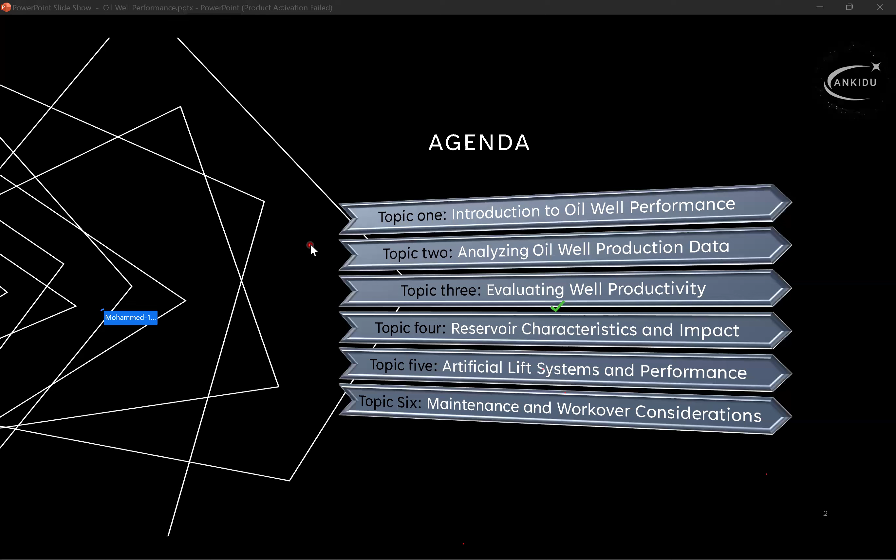So, introduction to the oil well performance. Building our discussion, we will cover the pre-drilling preparations, well planning, and drilling process. We know it's crucial for successful outcomes. Each stage, from completion to ongoing operations, affects not just the immediate yield, but also long-term productivity.

So the well basics include and it's essential to comprehend the fundamental components that ensure effective extraction. Understanding the oil well structure starts with key parts such as the wellhead, where all the surface equipment is mounted, enabling control over the flow of oil and gas. Casing plays a crucial role in providing integrity for the structure of the well, while analyzing well performance.

Various factors such as geological conditions, equipment quality, and operation efficiency must be considered, all of which I will dive deeper into on the next slide about well performance.

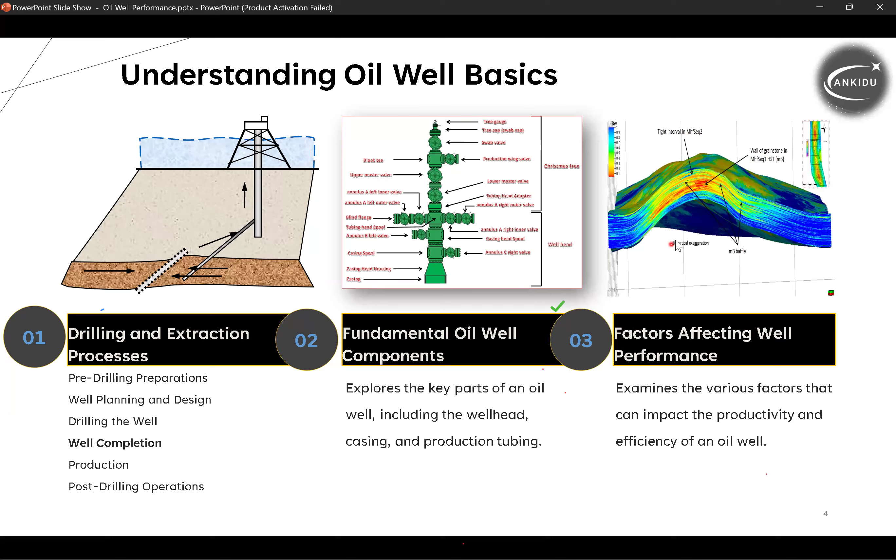So let's continue with drilling. We have to understand the complex machinery involved, from the rigs to the experienced people, how they were trained working in this environment, starting from the pressure gauges and valves, etc. The pre-training given to them is critical for effective drilling and extraction.

So drilling involves many risks, starting from the first day to the delivery of the well. So pre-drilling preparations are essential for successful drilling operations. Gathering geological data through surveys and sample collections can identify optimal drilling locations.

So for pre-drilling preparation, let's take an example. Conducting geological surveys is very crucial for selecting the well location. This groundwork aids in assessing rock and soil characteristics, ultimately influencing site selection.

Let's go further into well planning and design. It's the most important factor, not just the technical specification, but also safety and environmental impacts based on gathered data. Creating a detailed well plan is vital for minimizing risk during drilling.

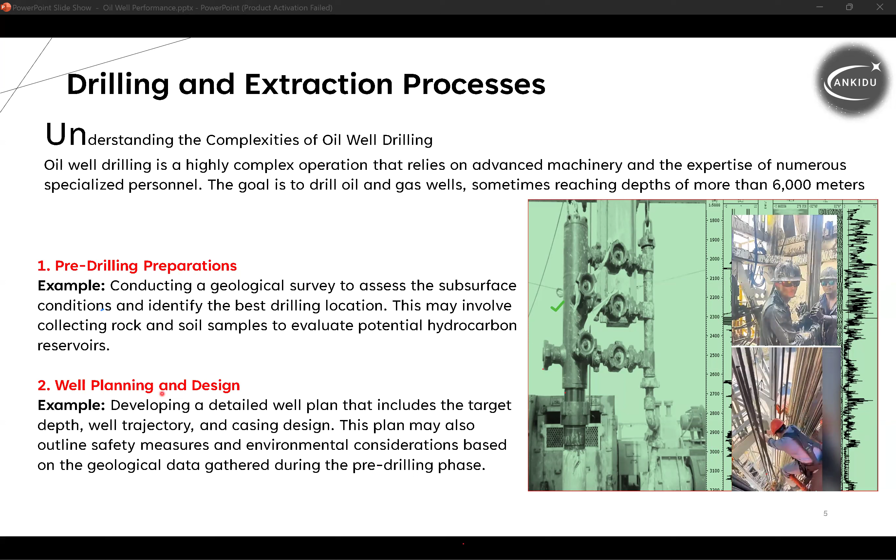Drilling the well starts from putting the rig on site and from the first day of drilling, penetrating the surface, going to the target formation, circulating the muds, and everything else. It's a very complicated procedure, and it is time and cost intensive throughout this phase.

Well completion involves installing casing and cementing the sand face between the casing and the formation, which is very crucial, along with perforating the well - where to perforate and what type of casing to use. All calculations must be provided to complete the well perfectly, otherwise we may have a collapse problem if the casing material isn't selected to match the exact formation.

After finishing the drilling, we have to consider production. So what should be installed in terms of the Christmas tree, the flow lines, and what pumps are needed for production, whether oil producer, and how to optimize the production afterward and optimize recovery from the reservoir for that specific well.

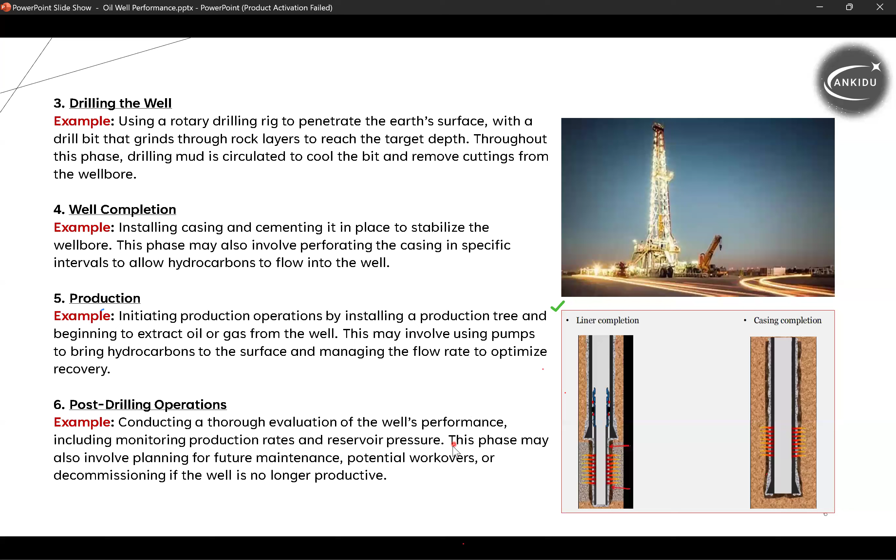Post-drilling operations are very important because we need to know if the well performs as expected, from the first day of planning the site through drilling, finishing the drilling, and delivering that well connected to production. Monitoring production rates and reservoir pressure, etc., is very important to assess what the well is doing.

So these kinds of procedures and processes have to be followed to ensure the well performance is as expected. Let's go to one of the fundamentals about oil well components.

We know for sure there must be a Christmas tree and wellhead installed, and these parts are connected together to seal - there should be no space. What parts should be installed and why, how many valves should be installed, what type of well, what is the operating pressure - all these equipment should be installed perfectly, and it's very crucial.

Understanding oil well basics leads us to the fundamental components essential for well operation: the tubing head, spool, etc. The tubing adapter serves as a crucial interface between the wellhead and the production equipment, while the casing head housing supports the weight of the casing and seals the annulus. The casing spool is vital for properly sealing the casing and providing connection for other equipment, facilitating pressure management.

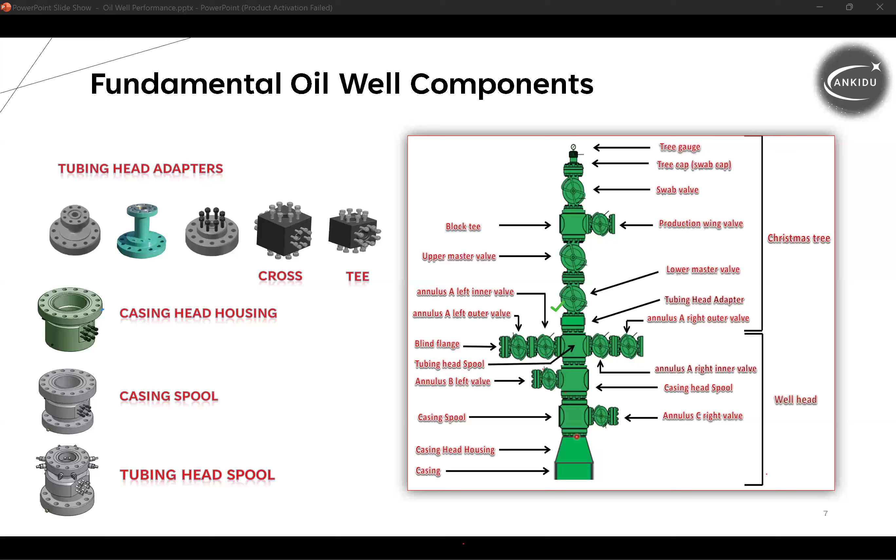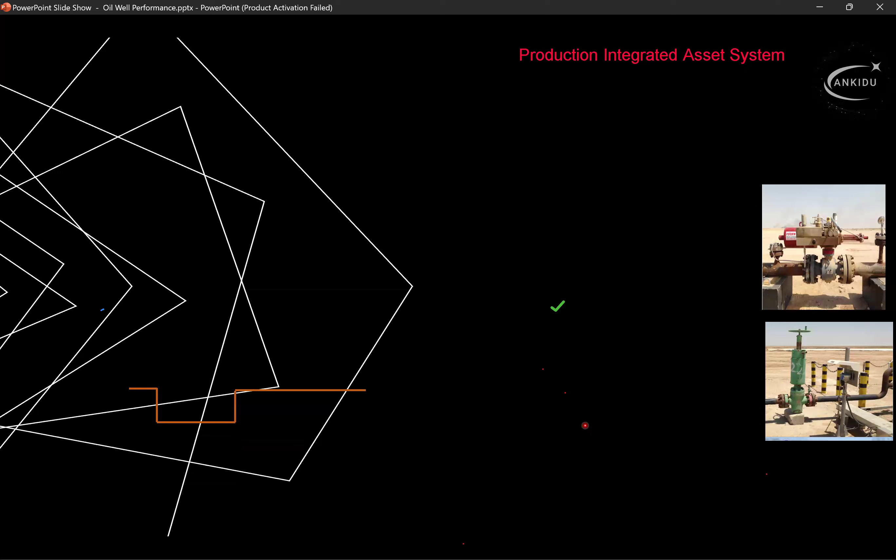Let's look at this production integrated asset system, starting from the well and ending with the degassing station. What we have to consider, and what questions should be asked regarding this production system: why we installed this Christmas tree, where we are going to produce from - is it from the annulus or from the tubing?

So why do we have to put this Y piece? What surface equipment will be installed - the choke size, the gate valve, the safety valve? What is the length of the production pipe? What is the diameter of that production pipe? How many valves will be installed along the way to the degassing station?

What are the inclinations? We know some pipes have inclination along the way from the well to the degassing station, and this may affect the flow from the beginning at the well all the way to the end at the degassing station.

So when the flow reaches the degassing station, is it connected to a high pressure header or a low pressure header? Why might we ask these kinds of questions? Sometimes we find it's related to the oil well performance.

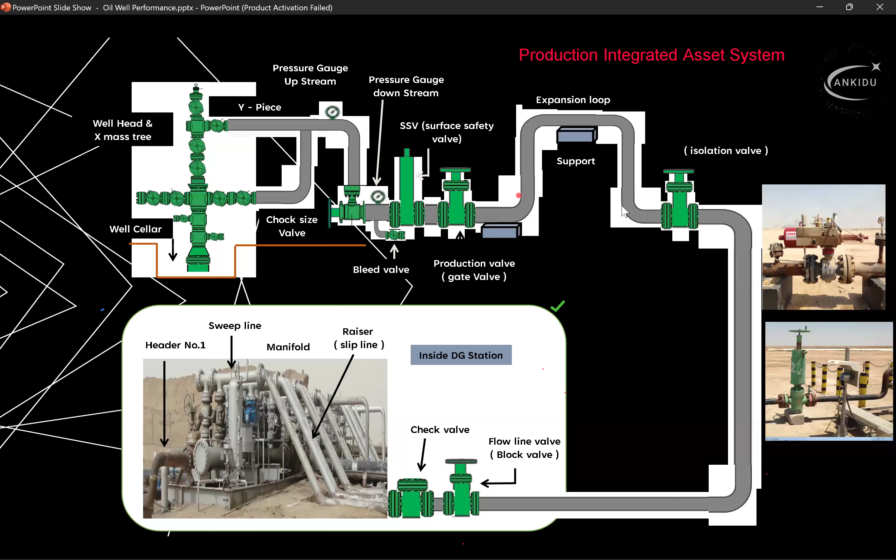So at every point we have to consider the pressure, temperature, etc., and the factors playing around the well performance. So if we start talking about factors affecting oil well performance, let's take this illustration.

Starting from reservoir characteristics, which is porosity for sure, permeability, and fluid properties — what is playing here and affecting the flow from our reservoir through the wellbore.

What is the operational condition? Do we have a pump installed? What is the pump efficiency? What is the depth of the well? We know some wells with higher depth, depending on the perforation and the reservoir, may not easily extract the hydrocarbon because of the depth or high pressure, or maybe some circumstances affecting the fluid column, because we have back pressure from gravity, hold-up factors, flow regimes, etc. All these kinds of consideration regarding operational conditions definitely impact the well performance.

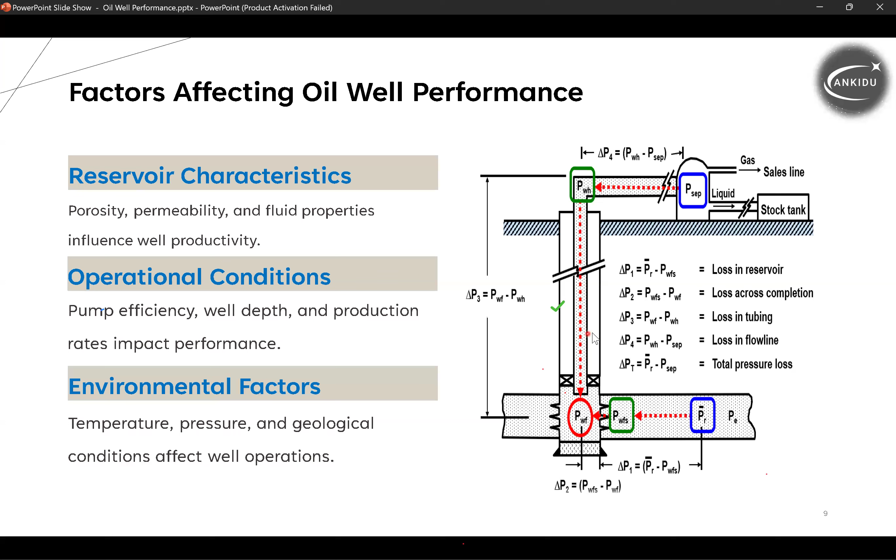So back again to reservoir characteristics, which is fluid properties. We know the fluid properties play a crucial and vital role in the reservoir and in the well performance.

So we have a question here: can the fluid properties change over time? What is the answer? Yeah, it can change. So for instance, taking the viscosity or GOR, water cut — from the first day we can expect these type of values to be constant, and then it could change over time.

So when it changes from what is expected, we have to consider new rules for the well performance, and manage techniques such as water shutoff, EOR, regular monitoring, extra monitoring, and determine if it's possible to keep it as it is, or what is the mitigation regarding these types of information changing through the well performance oil life. So all these kinds of questions have to be raised and studied very well by reservoir engineers regarding well performance, and that's very important.

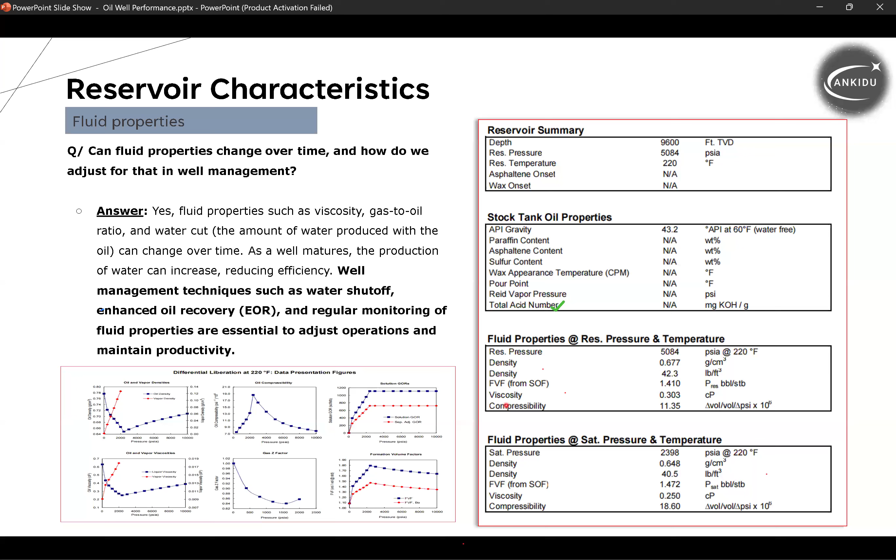Analyzing well production data - we know the production data is very important. It's like the eye of the engineers working in monitoring the well performance.

So what is the collection and compilation of that data? Starting from gathering production data, organizing the data, and validating data quality. These steps are very, very important.

Taking the example of collecting data, it's about what the well is doing in terms of oil or water, or what is the BSW for that well. Then we have to put it in a structured database. It's crucial to establish an effective data collection and compilation process.

First, consistent daily records of oil, gas, water production are essential. This includes gathering all relevant production data to ensure comprehensive insight. Once we gather the necessary data, we must compile it into a centralized database.

The database is very important. We will go through some slides about the data and the visualization of that data, addressing issues like insufficient well tests, incorrect entries, or bad routing information.

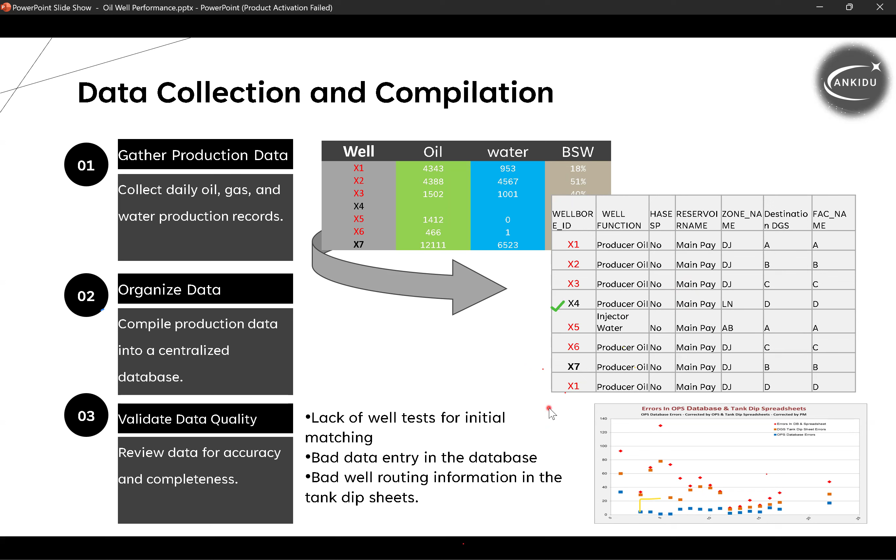The data lays the groundwork for analyzing production trends. We'll look at production trends in a moment. After collecting and validating production data, the next step is conducting a thorough production trend analysis.

What does that mean? This involves examining historical data to uncover fluctuations and patterns that may not be immediately apparent. Sometimes we have to keep an eye on the production data to eliminate uncertainties and discuss why we have these trends and fluctuations and patterns.

Identifying these production patterns is crucial as it aids in recognizing inefficiencies in well operations, such as issues with pumps, or maybe blockages stopping the well from producing as it could be.

So if we consider the plateau rate is 10,000 MBD, why is there decreasing pressure in oil performance, reaching about 1 or less than 1 MBD? What is the mitigation to bring the well back? What is the plan to restore production from the well?

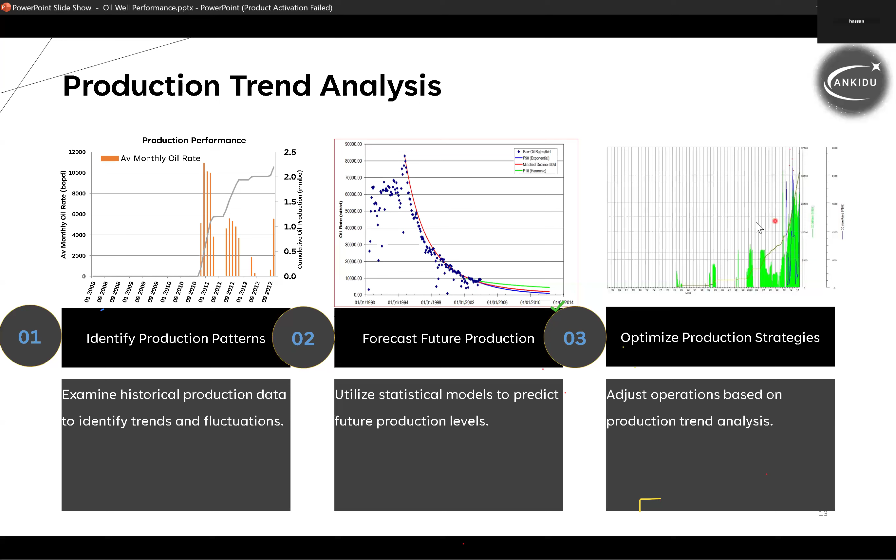Forecasting based on historical trends allows us to adjust operations proactively, optimizing our production strategies moving forward. Optimizing production strategies depends on what we have already collected as data, monitoring well performance, and predicting what should be done through the oil well's life, adjusting operation based on that production trend.

Why do we have these anomalies in production? It's regarding the time frame - is it 1 year, 2 years, and why is it going down? Is there any potential to restore the production? Yes, definitely yes. So how can we assess that production trend?

We go back to the historical data we have, cumulative production, and see what is going on here, what production enhancements should be done. Understanding these trends, operators can identify where to tweak operation parameters.

For instance, if we have ESPs installed, we can manage these ESPs and restore production from those wells, or maybe we need to do some extra work as surveillance, do a workover, or add perforation, etc.

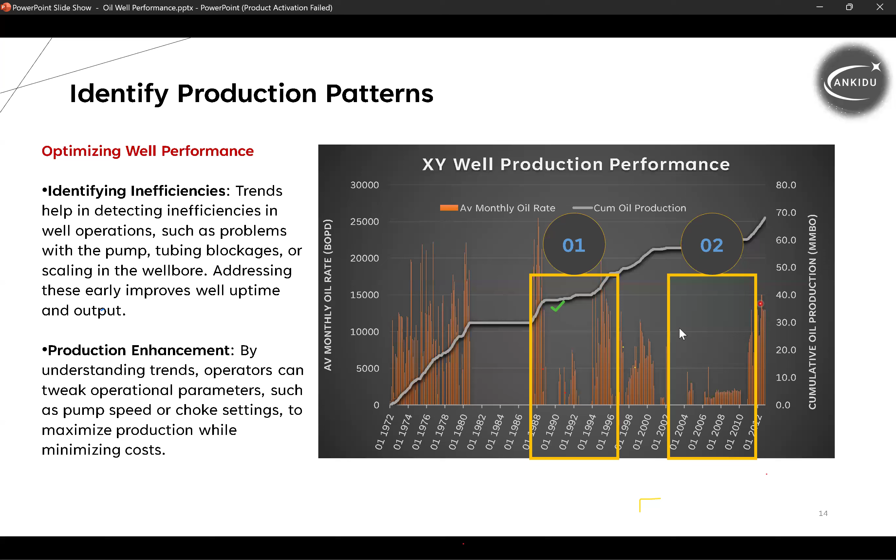So from these trends and nice plots, we can discuss with the production engineer and facilities engineers to see where the problem is and how we can mitigate it and return to normal production. We can see there's a huge difference between what we expected and what we get afterwards. With the help of our calculations we can understand where the problem is and investigate further to check where the underperformance happened and why.

So maybe it's not related to the well itself, maybe it's related to another facility connected to our well. So underperformance may not be related to the well itself.

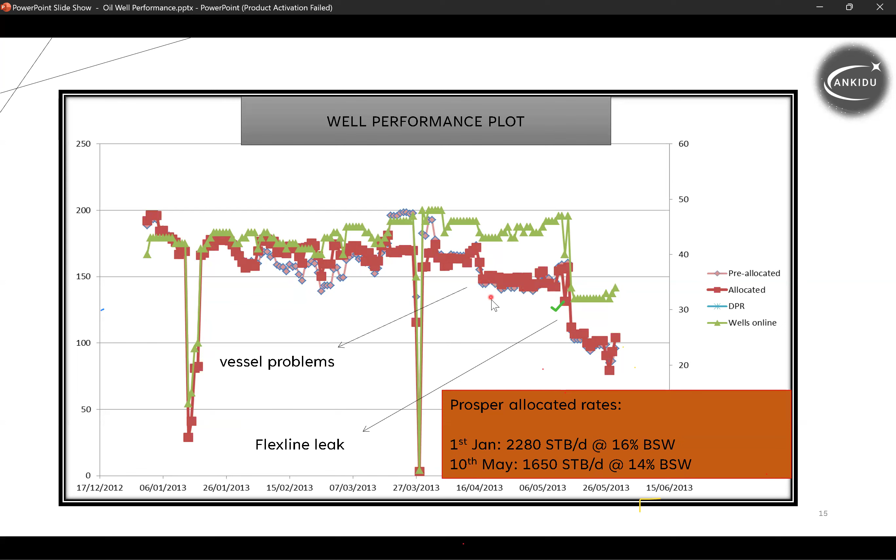So we have to do our prediction to know where we can enhance production, where we can enhance the reservoir pressure. This point is very crucial in terms of forecasting future production. Identifying the bottlenecks in the well's performance, and the predictive analysis, can suggest where we can add more oil or restore production for the rest of the well's life.

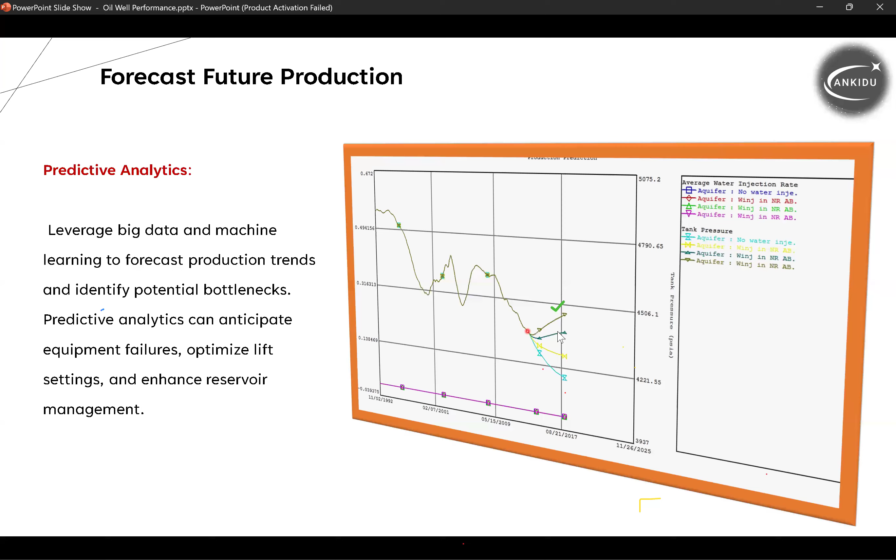Regarding the water cut, we have what the GOR represents here. So all these parameters, after putting them into our software and plotting the IPR VLP, can tell us the optimum flow rate we should expect from our well. This is very important because we need the well flowing for a long time with stable conditions. Fluctuations like these trends and plots are not acceptable, because if we exceed the amount of excessive production, it may affect the well performance, and we could lose the well.

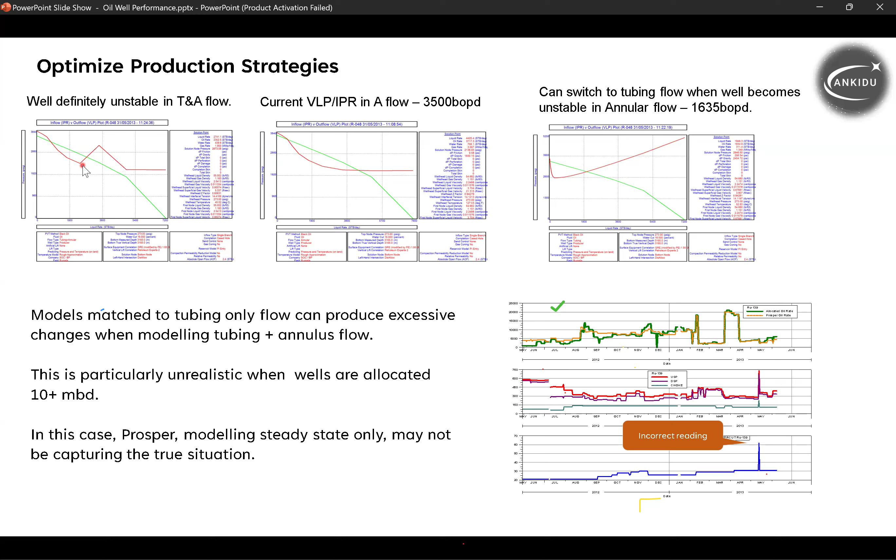So what we have nowadays is new technologies implemented in our fields. Considering the current VLP-IPR in the flow, it's critical to embrace automated monitoring systems for effective production management. These systems enable real-time data, connecting our wells to our software and analytical systems so we can track well reservoir performance, facilitating immediate adjustment.

We've seen many examples for well performance where we conduct fast decision making and implement new strategies to mitigate the risk of losing the well, avoiding reservoir damage such as excessive drawdown leading to issues like coning or sand production. This preventive strategy ensures long-term recovery stability.

So integrating smart well technology with real-time monitoring capabilities elevates our operational efficiency. It's very important, very crucial, and very handy nowadays. As an end user, you have all the data instantly presented on your screen, so you can decide where the problem is and how to mitigate it.

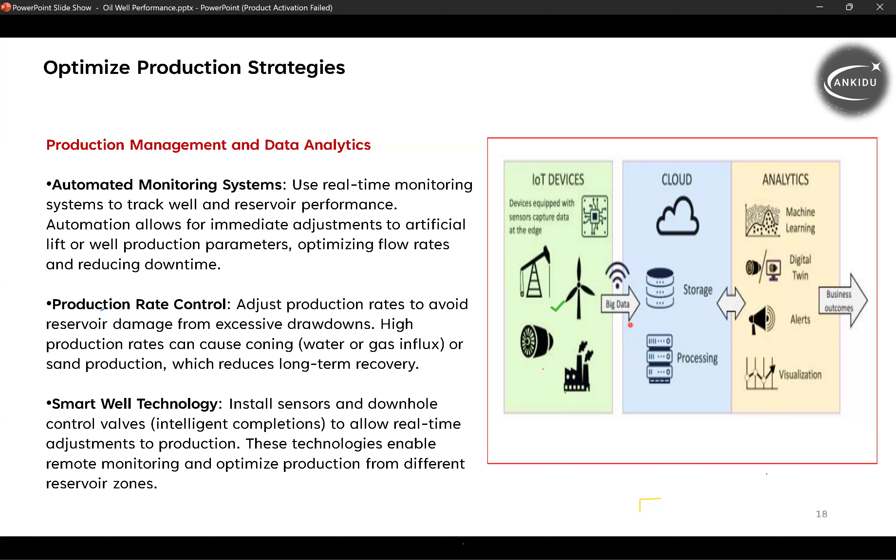So allowing for adjustments across varying reservoir zones, moving forward for a nice performance of our well. This eventually ends with evaluating well productivity in a good manner. So evaluating well productivity index calculation.

We know it's very important to know the well productivity index. How the well is producing is crucial to understanding how to optimize extraction methods. So the productivity index calculation measures the relationship between production rates and pressure drawdown in the reservoir. This helps quantify well efficiency by assessing how effectively the well converts reservoir energy into fluid production.

So moving from unstable flow to stable flow, where's the maximum point we can reach? Taking this plot between Q and pressure, we can build a good relationship between the pressure and production, and understand what is going on inside the well and reservoir.

Having said that, the well converts reservoir energy into fluid production. Key factors that impact well productivity include permeability and skin effect, which can alter flow characteristics. By assessing reservoir condition, we can identify opportunities to enhance performance of our well and maximize output, as we have to remove this skin and eliminate these factors.

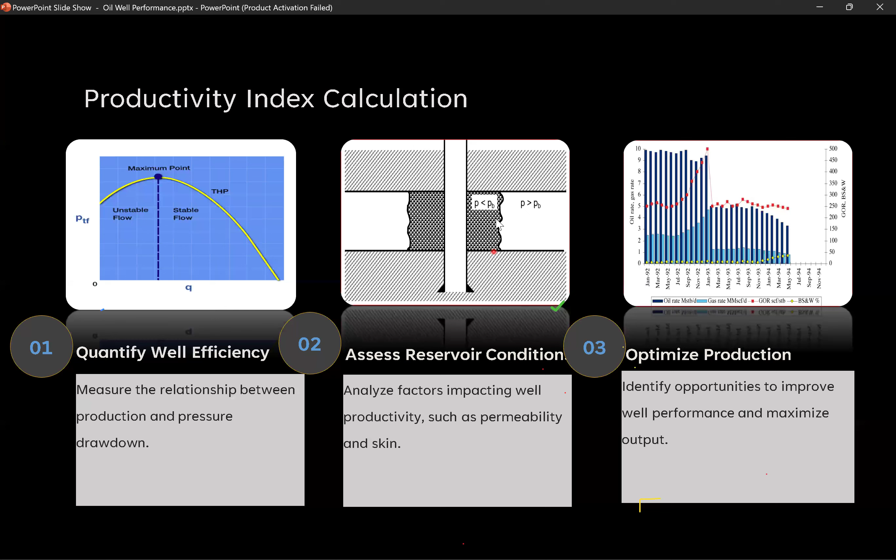So this consists of production efficiency, which delivers the actual versus potential production rates. How can we do that? We have to monitor all these kinds of factors, which of course contribute to the well efficiency.

So what are the key concepts in quantifying oil well efficiency? Understanding production efficiency, PE, is crucial, as it represents how a well is performing against its ideal capacity.

So moving from Q1 to Q2, why do we have Q2? What is the pressure? Why do we have this declining pressure? Is it good for the health of our well or not?

High PE may suggest efficient operations that maximize output, reflecting minimal downtime and optimal management. Conversely, low PE, which is production efficiency, the actual production rate over the theoretical or potential production rate, can indicate issues needing addressing, such as mechanical failure or reservoir challenges.

The significance of mechanical efficiency lies here. We have to move to mechanical efficiency, which is useful energy output over the input of energy. This can be the percentage of mechanical efficiency for our well or production equipment, which should be monitored vigilantly for signs of inefficiency to avoid costly repairs and operational losses.

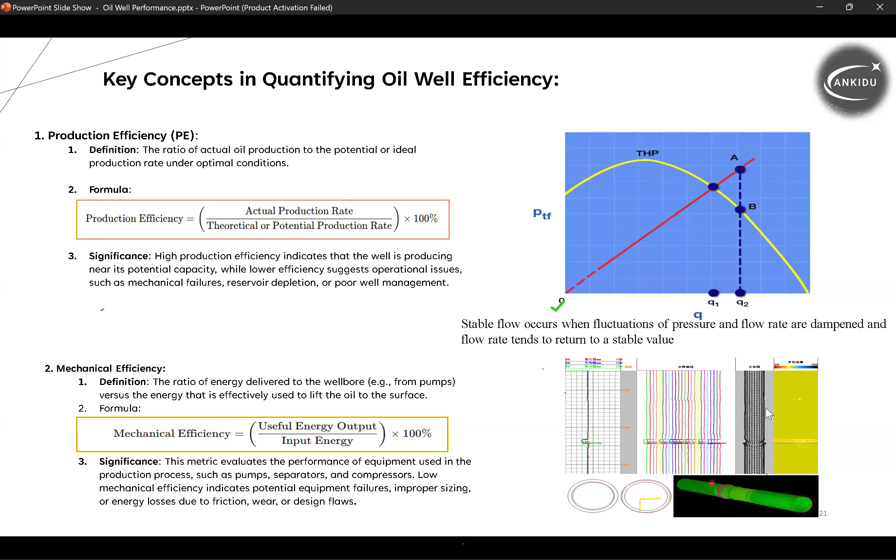So recognizing these metrics sets the stage for discussing volumetric efficiency, which measures actual fluid production against theoretical expectation, linked to effective reservoir management. So we run some tools to investigate our well: what is the casing situation, what is the tubing situation, do we have any anomalies, and can we identify anything related to mechanical efficiency.

The volumetric efficiency is the actual fluid volume produced over the theoretical fluid volume. Our software tells us what should be expected, and the actual can be different because we may have produced more water or more gas compared to the theoretical situation. So what has to be done, how do we mitigate these things?

Continuing from production efficiency, volumetric efficiency plays a vital role in understanding well performance. It is defined as the ratio of the actual volume of fluid produced compared to the theoretical, which indicates how hydrocarbons are being extracted. So this is volumetric efficiency.

It's very important to know the volumetric efficiency for our well, and that can be done through our simulation software. This metric is crucial for evaluating the effectiveness of our extraction methods and reservoir characteristics. It's important to know how the well is doing, because otherwise we can miss some data and not conduct proper predictive analysis for our well and reservoir. Missing some parts cannot give us the actual fluid, and we lose development efficiency.

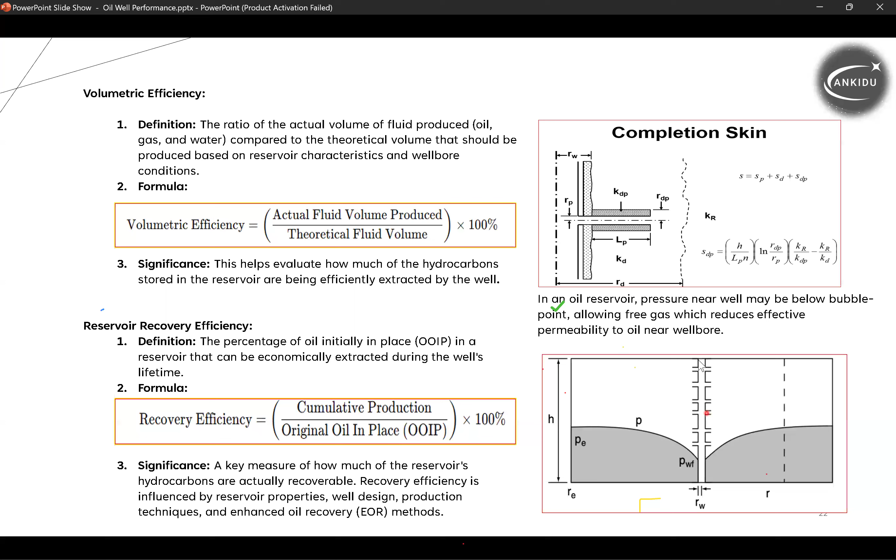Taking some key points about assessing the reservoir condition: the role played by the skin factor, and how that skin relates to effective permeability near the wellbore.

So we have some issues, most of the time from mud filtrate or some skin damage regarding our production. Excessive production can damage the reservoir near the wellbore, creating unwanted drawdown between the reservoir and our wellbore, which affects our production from the well. There's also damage caused by injection - the injected water may not be compatible with our formation, which plugs the boreholes near the wellbore. This affects the continuity of hydrocarbon flow from the reservoir through our wellbore. These fine plugs affect the formation near the wellbore, causing damage that affects the production performance of our well.

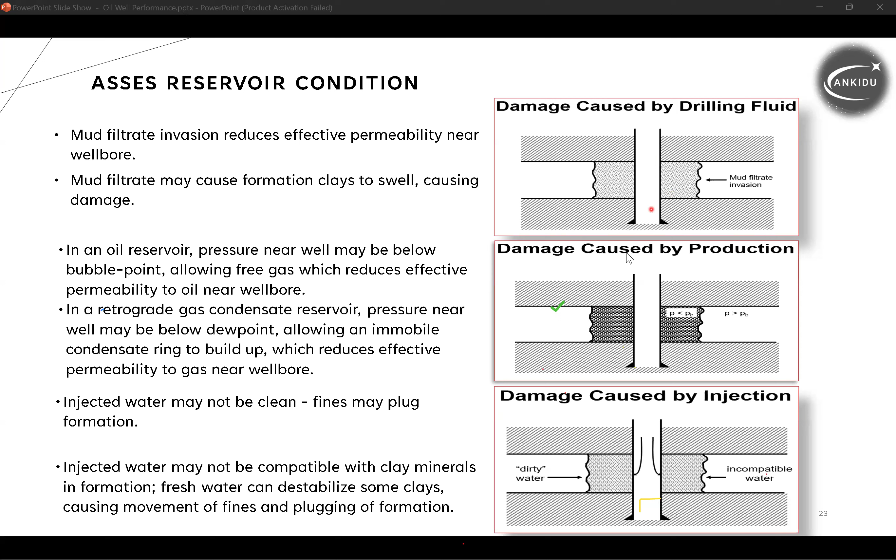For production optimization, going back to this concept, we have to consider where we're starting - the reservoir pressure, and how that reservoir depletes over time. What is the performance at each time? We have to consider this at each interval, and intersect with our VLP - the VLP-IPR intersection gives us the predicted performance, meaning the optimal flow rate for production. We consider this by inputting these pressure values.

Starting from the initial pressure, and the continuous drawdown through the life of the well and reservoir, we see how that affects the well's liquid rate performance. These inflow and outflow curves can be predicted and measured, calculated through our software, giving us the outcome of how the well performs.

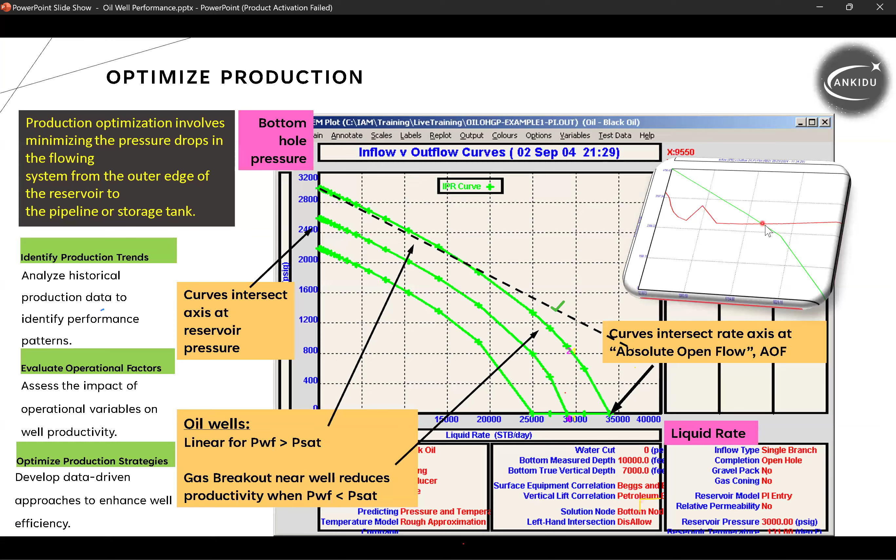Again, with the optimization opportunities, identifying production bottlenecks is key. For instance, we've seen the preferred flow path is through tubing, but our software tells us this isn't the optimum flow pattern for the well. So maybe converting from tubing to annulus, or tubing-annulus, will give us more stable conditions. Identifying these bottlenecks is very important, otherwise we can suddenly lose the well, and that's happened a lot.

After deep consideration and analyzing the bottlenecks, these kinds of problems have been mitigated and removed because we know exactly what the flow path has to be put as.

For instance, for another reason, the flow line has restrictions. So why does the flow line have restrictions? This kind of question has to be studied well. Is the flow line size not compatible with what the well is doing? Maybe this can be a bottleneck for the optimum performance of our well, and has to be removed and mitigated, or changed.

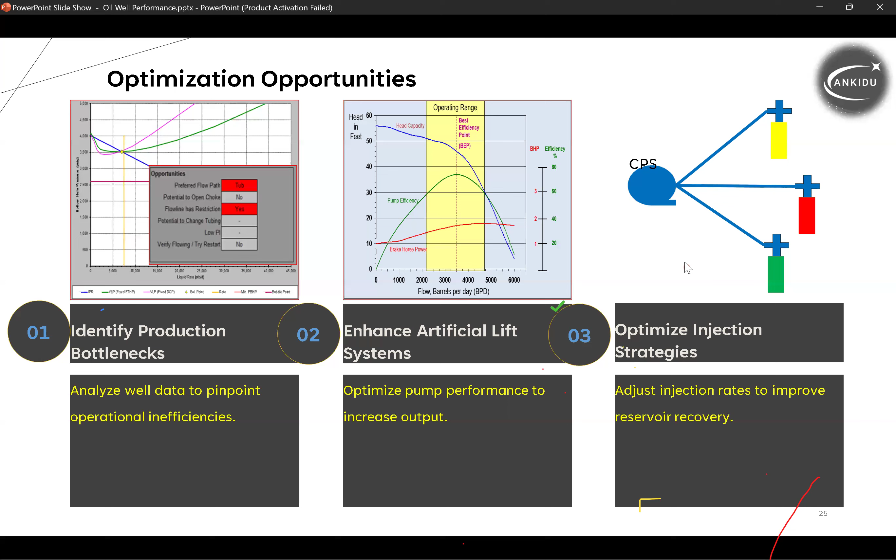Reservoir characteristics and impact - what does that mean? Porosity and permeability, of course. We know the crucial role played by porosity and permeability, and how that influences well performance and reservoir performance afterwards.

We've seen some issues with the skin factor, how we can mitigate this skin factor, for instance through acidizing, to remove these unwanted parameters.

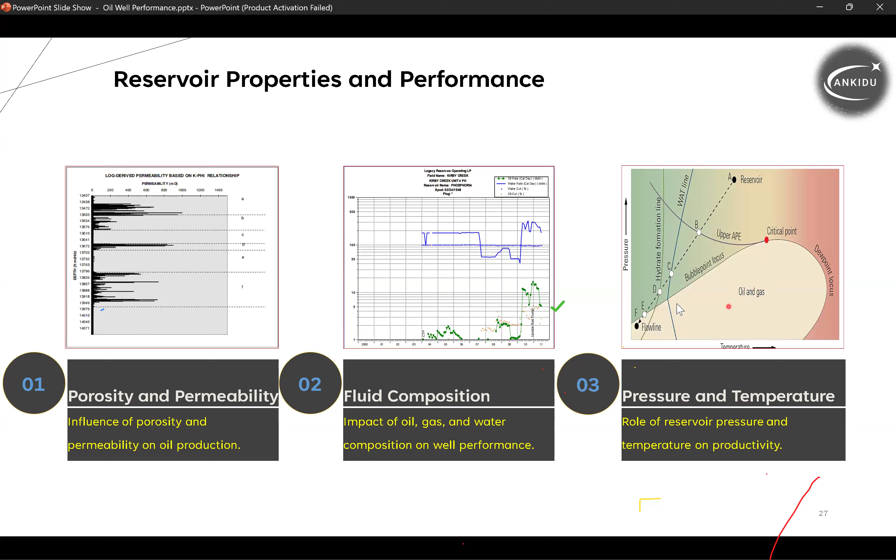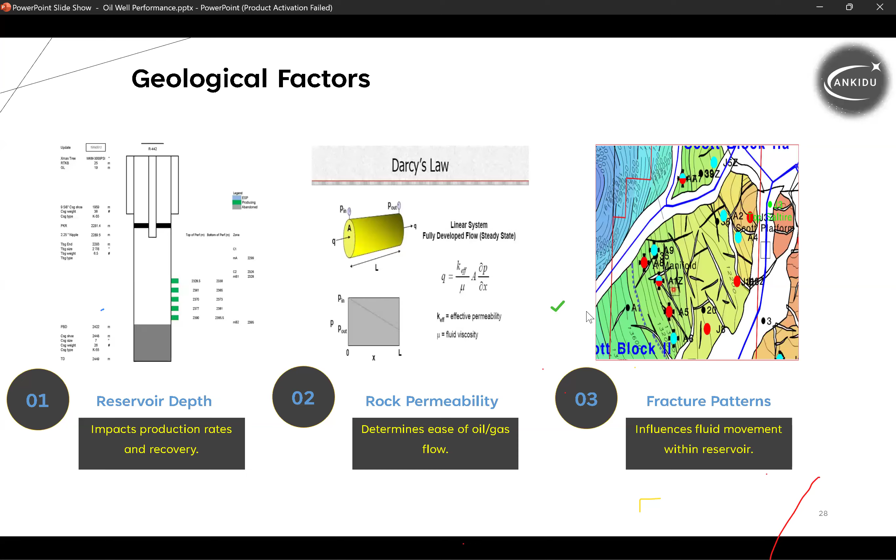Artificial lift system and performance: pump efficiency. We already talked about pump efficiency, so measuring it is very important. Why? Because if we don't have the right parameters for our pump from the VSD, hertz, and ampere running the motor, we may get higher temperature affecting the performance of the ESP installed in our wells.

This may lead to a need to evaluate system efficiency to ensure optimal operation and performance. This involves measuring pump performance and analyzing energy usage consistently to identify areas for improvement, so this threshold should not be out of this optimal area.

Over performance or under performance of the well running on ESP can lead to ESP failure, and we have to pull it and install a workover rig, which costs money and time.

Lift efficiency: we have to consider the intake pressure and discharge pressure through the performance of our ESP. This lift efficiency metric allows us to evaluate whether the system meets its intended performance goals, meaning the goal of the performance of our well.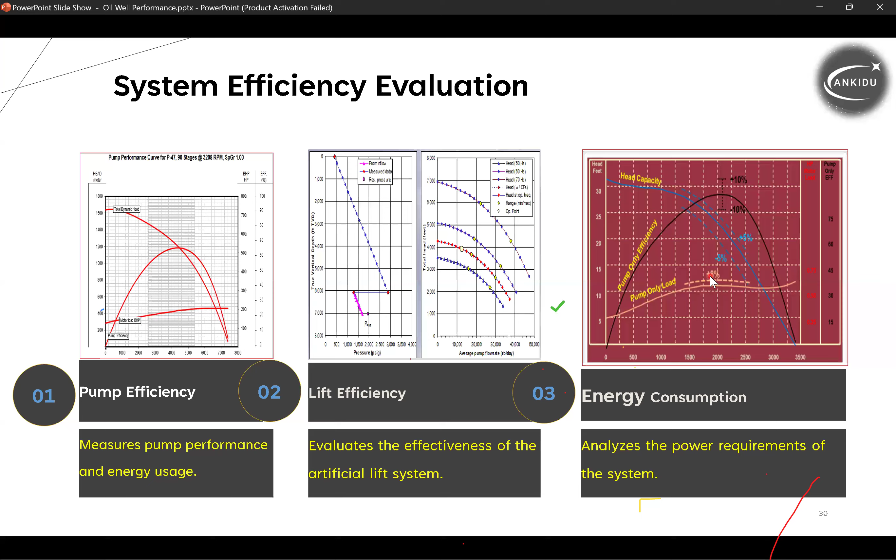So, optimizing techniques: for instance, taking the right stages for the ESP based on the depth of our well, where it's perforated, how much it can produce, and what stages are needed to maximize production through our ESP.

Putting the right performance through the well performance plot of our ESP can minimize energy consumption because we have a lower power requirement when the well's artificial lift is at the optimum curve location, giving optimal performance of our ESP in good condition.

So we don't have to worry about friction between stages, or higher production rate leading to more corrosion because of erosion velocity, etc. These issues—higher temperature, higher pressure, higher ampere—lead to higher temperature inside our ESP and then underperformance of our ESP.

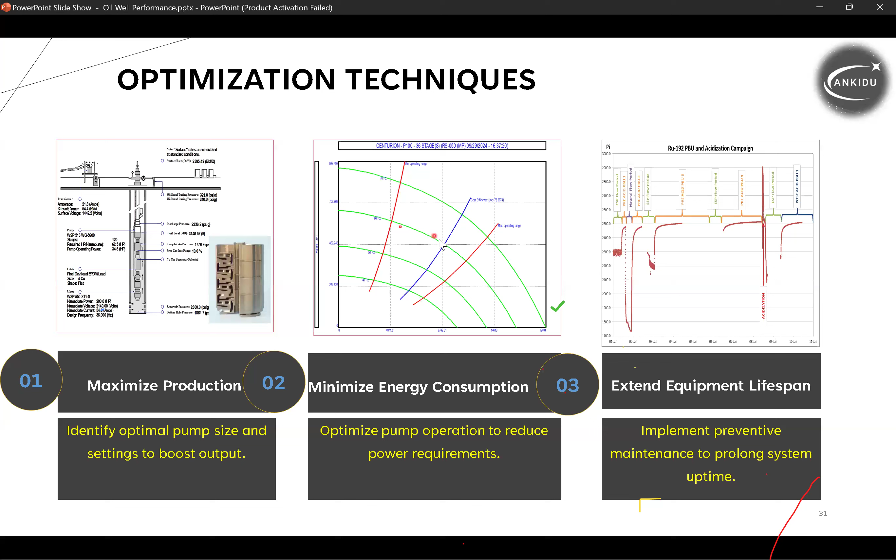So these are questions we analyze to extend the lifespan of our ESP, because we may need to flush the ESP to remove any restriction inside it. This can be done to restore production and put the performance back in the optimum location within the well performance of our ESPs.

Maintenance and workover consideration: back again to one of the most important factors and plots, analyzing production data. If we consider a plot where the trend is going down, why is it going down, why is the well not performing as expected, and what can be expected in terms of underperforming wells?

Is it something related to the well itself? Is it related to the facilities, as we've seen? Is it related to the reservoir? What mitigation do we need to remove these kinds of problems affecting our well performance?

What strategy should we follow to inspect surface equipment, for instance? If we see pictures like these, there's definitely a problem relating to corrosion in this well, and we have to close it. Sometimes it's not noticed the first time, which can lead to a huge impact on the environment and the well itself, so scheduling routine maintenance is very important.

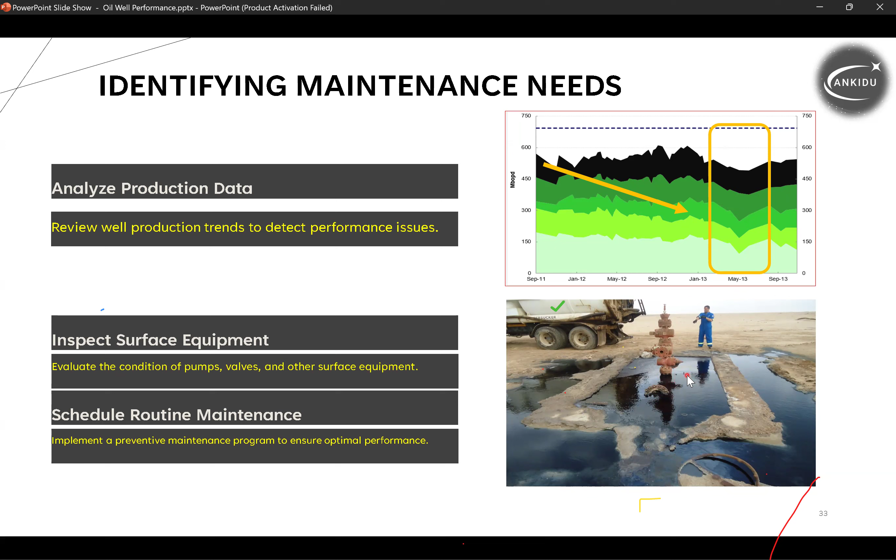So how can we mitigate these things through our maintenance program? Workover planning and execution is very important, taking notice from these graphs where the problem is for these unstable conditions in some wells. We have to identify optimization opportunities to see where the well is underperforming, and then how we can make the workover planning and execute it for those wells.

To reduce or eliminate these kinds of risks from producing wells, mitigation may involve, for instance, if this interval is producing more water or gas, can we put a packer and keep producing from another perforation? If that happens again, maybe put another packer, and maybe do an intelligent completion, producing from this perforation and from another through different tubing, closing and opening as needed. This kind of workover planning should be done beforehand, after understanding what the well is doing, so sometimes we need to maximize the efficiency of our wells.

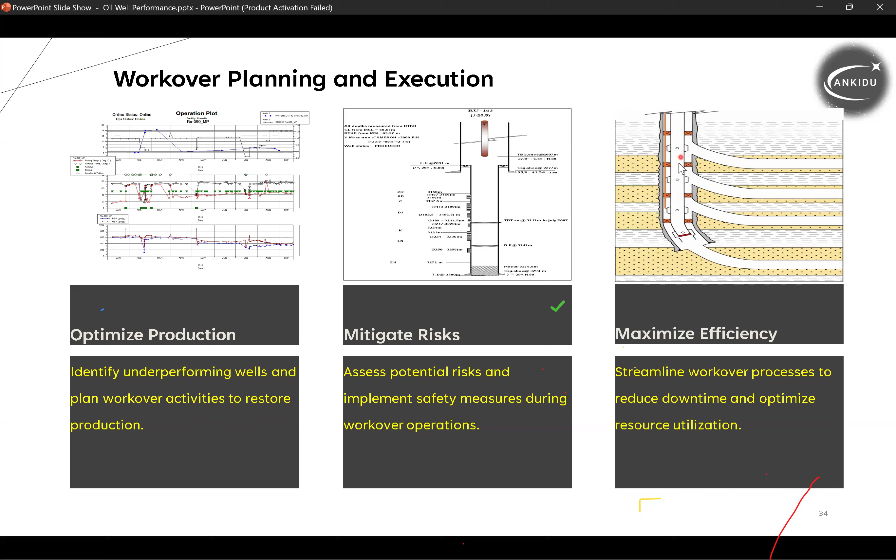Improving overall reliability is very important. We've seen that preventive maintenance should be done effectively and in a timely manner to address where the problem is. Some part of the Christmas tree, or inside the wellbore, may need maintenance, so preventive maintenance will tell us exactly where the problem is and when it should be scheduled.

Scheduling these types of remediation is very important to keep well performance as it should be, and we have to put it in our agenda, for instance, for the lower and upper master valve. Or maybe we have to remove some parts and install others to fix these problems, because these kinds of valves are considered a second barrier for our wells. So when we do any surveillance, having one barrier is different from having two barriers regarding safety issues.

Workover planning strategies may include water shutoff, injection capabilities, reservoir pressures, and equipment changes. So any type of data we have must be input into our workover program, like salt water disposal capacity, regulatory constraints, etc. This has to be considered through our workover planning for our wells.